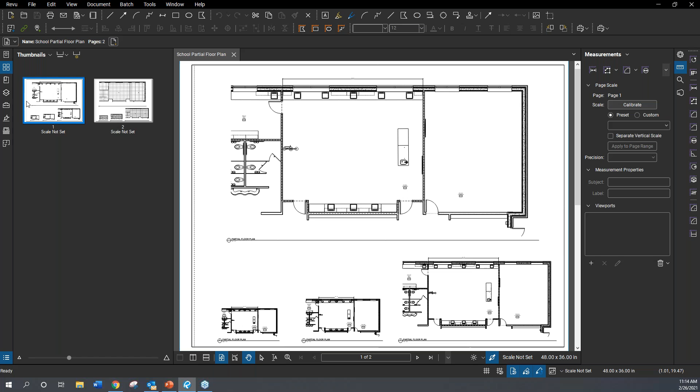So with that said, let's get right into the software. This is Bluebeam Extreme 2020 version. As you can see, I have a PDF file - this is a school building, a partial floor plan of the same area. What I want to bring to your attention is when I go over here to thumbnail, you'll notice down here in the corner next to the page size, it says scale not set. You can also come up here and engage this that says page scale, so it will show the scale of that particular page right here in the thumbnail.

Before we get started with anything, what I like to do is set the scale. So you can click right here, and here are the two different options that we have - we can either put one in by using a known dimension. Let's try that way. I'm going to zoom in here, and here's a known dimension that we have - I'll put in 34 feet 8 inches, and now let's go ahead and measure that.

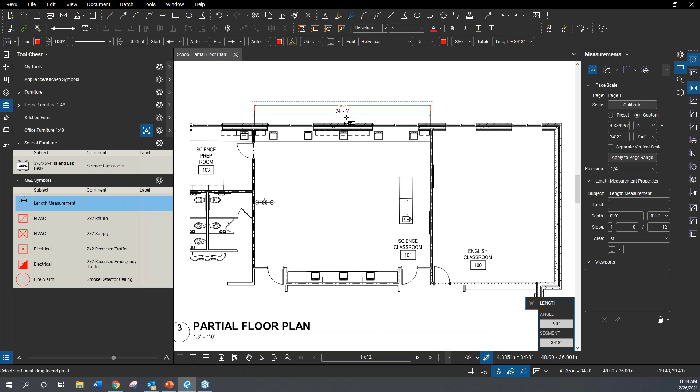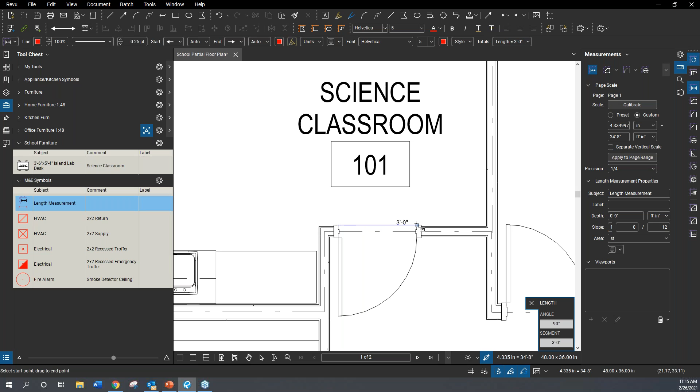Now that the scale has been set for this particular PDF, we can go ahead and do some other things. After placing the scale, let's do one other measurement. Let's measure this door, and we see that it is 3 feet wide, which is great. Just wanted to do at least 2 dimensions.

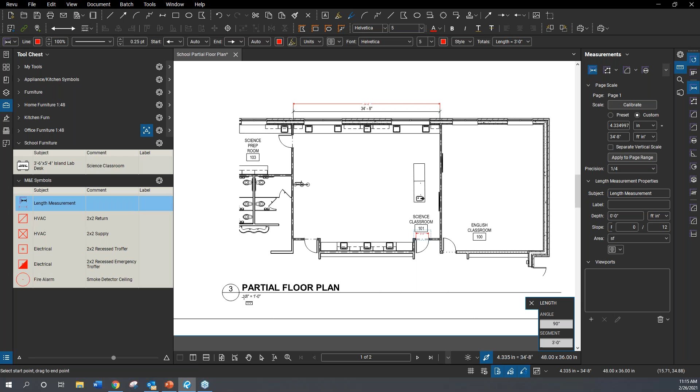If you notice in this particular drawing, I have 3 other outlines of this same floor plan. So I could possibly put some of my content over here, and you can see the scale is set to an 8th. Well, how would I do that with these other areas? How would I be able to mark up this PDF and have everything work properly from a scale standpoint?

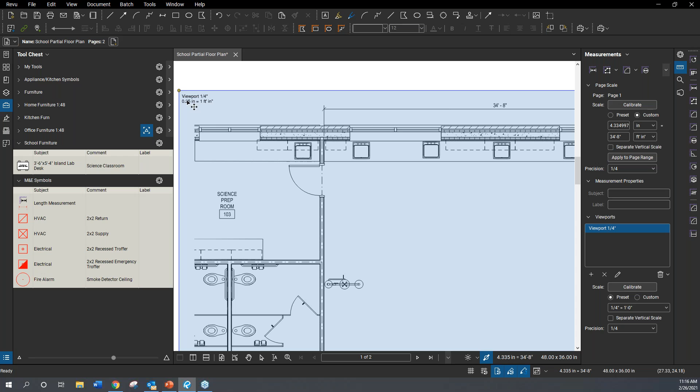The way you do that is you come over here where it says viewports and hit the plus arrow. I'm going to set the particular area, picking this whole area right here, and give this a name. This one is the 1/4 inch. Of course, you can set the scale right here, it's already set to 1/4 inch. Hit apply, and as you see, it says 1/4. My scale is called 1/4.

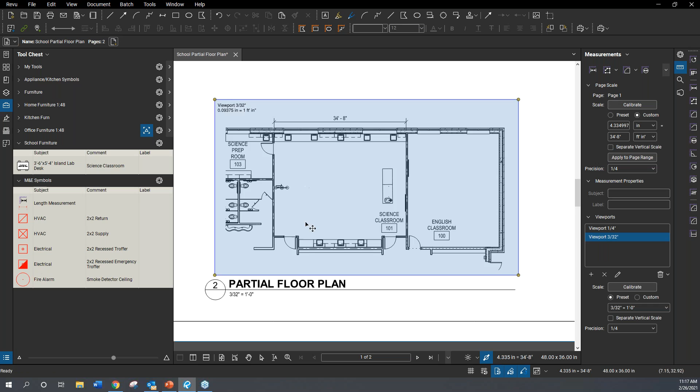I'm going to come over here to this one and create another one. I'll do the pull down and set this one to 3/32. Let's do one more, leave this one up here, and let's do a 1/2. As we can see here, a 1/2.

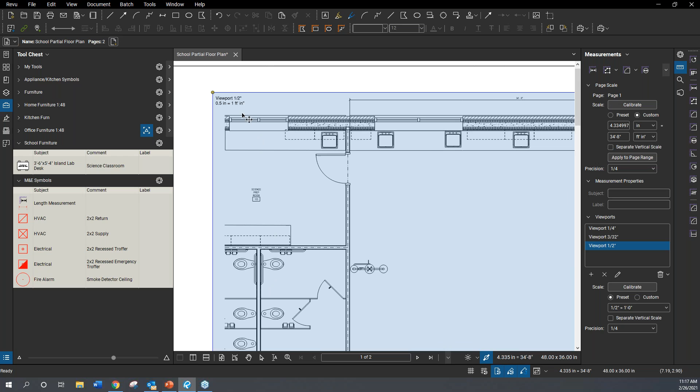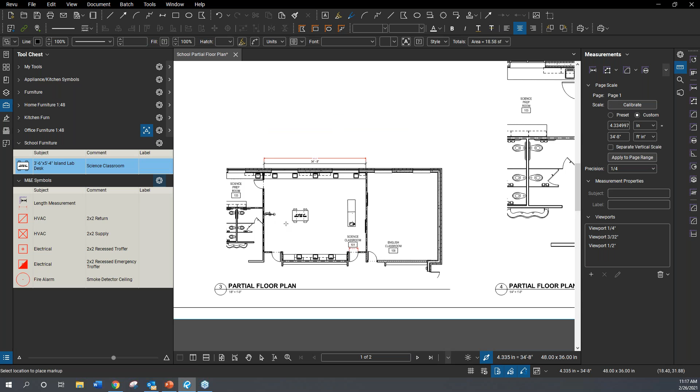So now with our scale set for the PDF document, we can start to use some of our symbology over here. Before I place it, let's say I select this particular table. If I place this table on the 3/32 inch one, it looks pretty decent. But if I go over here to the 1/4 inch, notice how it did not change size. So how could I use this symbology to match up with the scale of everything else?

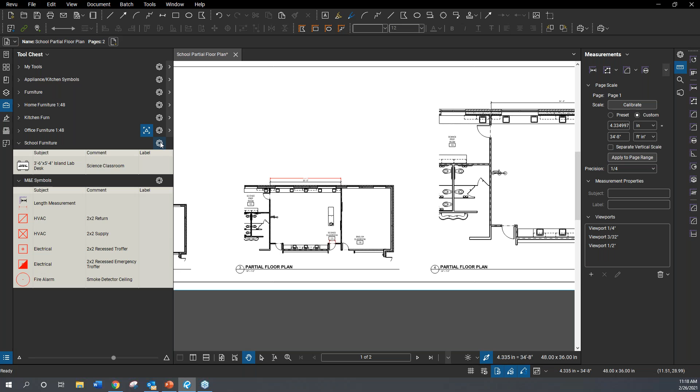What you can do here is click on the gear. You can also set a scale for your items in your tool chest. So I'm going to set a scale input preset to an 8, and hit apply.

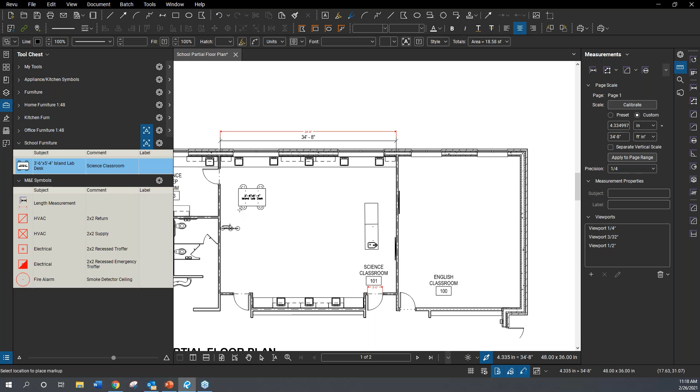So now if I place these tables in my classroom, or my science classroom, what if I take all of these, right click, and group them. I'm just going to add this particular group of tables to my school furniture tool set. You see those populate right over here. So what if I wanted to use this same layout over here?

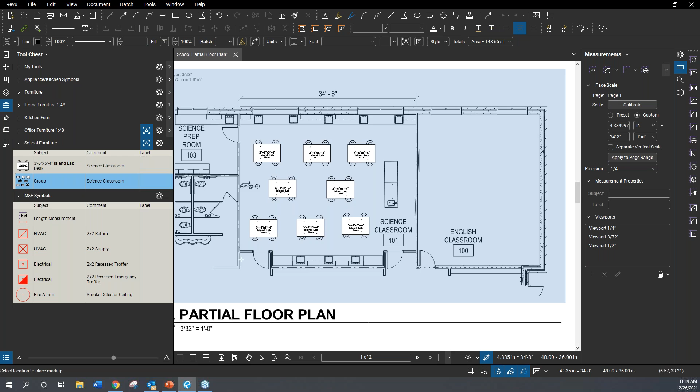Notice how the size of it changed to match up to the scale of that PDF area. Same thing when I go over here to the 3/32 inch, everything's matching up real nicely. Even when I go to the 1/2 inch one. I think that's pretty snazzy.

Any questions so far? Has anyone had any questions come up, Rebecca?

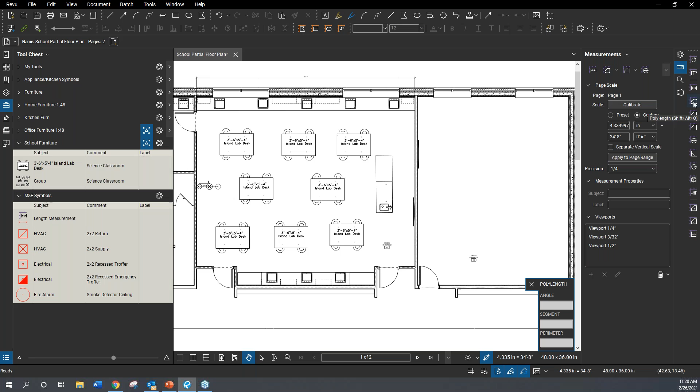Another thing we can do here with respect to doing poly length, I can select poly length over here. And as you can see, it gives me a total distance of 52 feet and 10 inches from this door all the way over to this door.

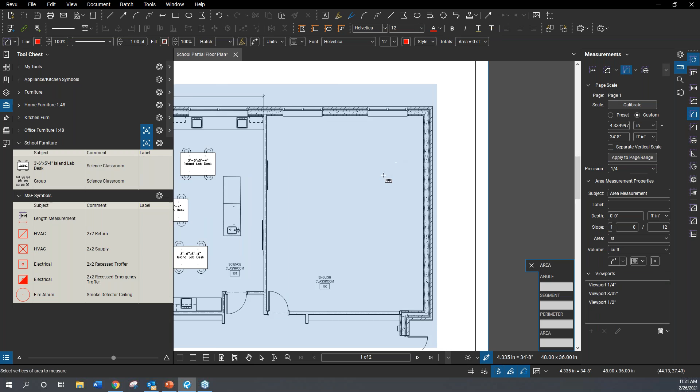Another thing I'd like to show you from an area standpoint, we come over here and do an area, and I can go ahead and do the same area. If you also notice, it's snapping to the edge of everything. So we can do areas.

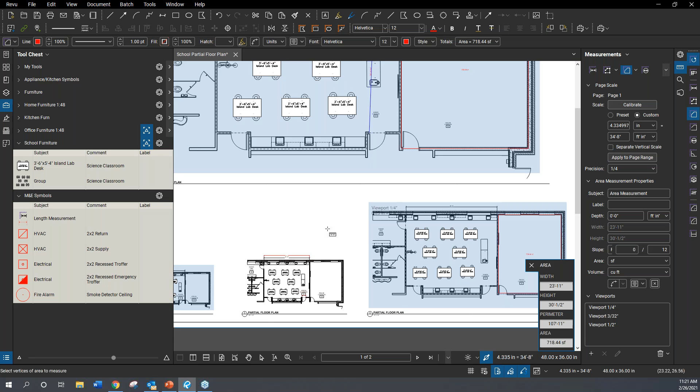What I also want to show for my MEP people that are on the line, let me go to my second sheet. With my second sheet, as you see, I don't have a scale set, so this time I'll use the input scale, 1/8 of an inch, and apply the scale.

What I'd like to show you here is I'll do a viewport for this particular area, set that to 1/4, and we'll do a quick one over here for the 3/32 one.

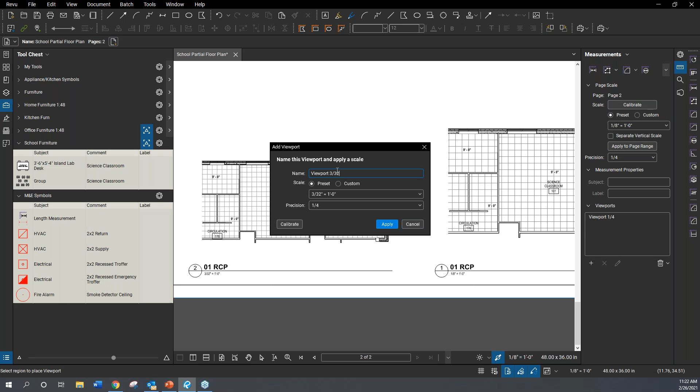Now that I have that, we can come over here to our MEP symbols. We can set a scale, and now I can place down a return air diffuser, supply air diffuser markups, if I was doing some sort of layout for someone to do this particular work.

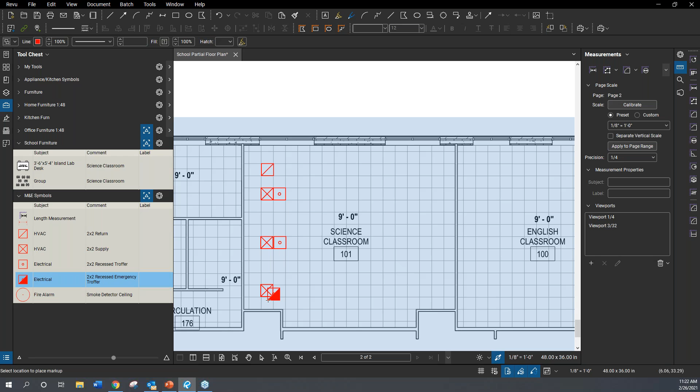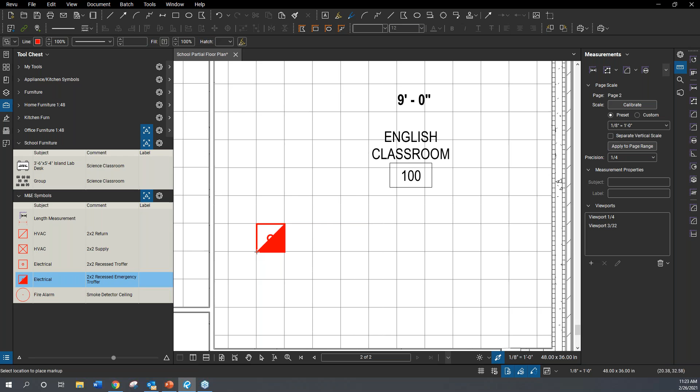Show light fixtures, emergency light fixtures. If you notice, if I pop over here to my 1/4 inch one, you can see that even as I'm placing this emergency symbol, it's matching up to the grid. It doesn't matter where I am, if I'm doing eighth, those symbology would use.

Even for fire alarm, so if I show my fire alarm symbology here, I can come over here, and as you see, it immediately goes to that particular scale on that particular viewport, as well as over here for the 3/32 one call out. All of these symbols to the left, I made, and of course set the scale.

Anytime you don't want to utilize the scale, you can turn that off, and then everything will go back to normal. As you can see, it's not scaling to that particular viewport.

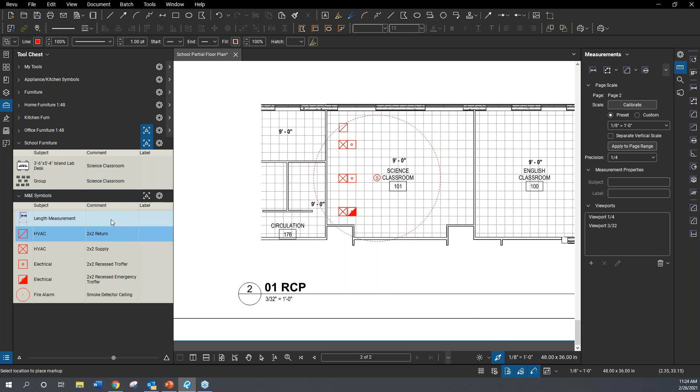Any questions, Rebecca? Okay, so no questions came up so far, Rebecca? Nope, I don't see any just yet. Okay.

Well, awesome, awesome. Even with now, the content I showed you down here is content that I made.

Let's see here, there's a question that just came through. Oh, could you show the process of creating a symbol? I sure will, thank you for asking. So let's see.

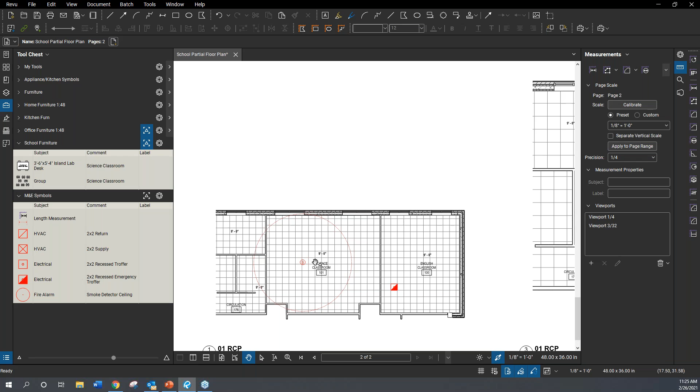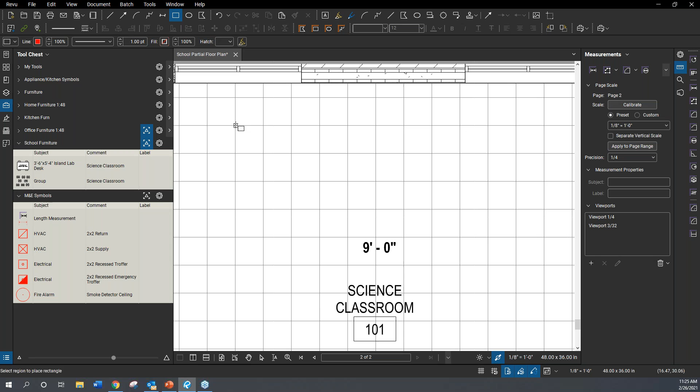Let's say I'm going to make, for example, let's do a 2x4 light fixture. What I would do is come up here and draw in a 2x4 light fixture that I would want.

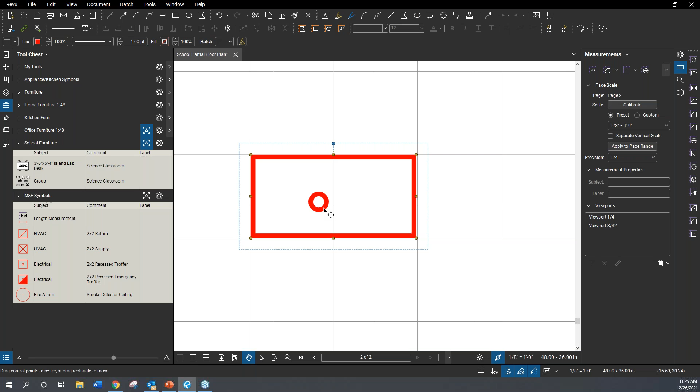And I'm gonna go ahead and show my circle, holding down the shift key for the circle. And if I'd like for this to line up, I'm gonna select this circle plus the square, do a right click, do alignment center, and do alignment middle.

What I like to do here is a right click, and I'm gonna do a group, so group that all together. And then what I would do next is assign this to be part of a subject matter. So the subject matter I want this to be part of would be electrical.

And then I can put in here 2x4 recessed troffer.

So once I have this symbol created, do a right click, add to tool chest, and then I'm gonna put this under M&E. You can see it right over here.

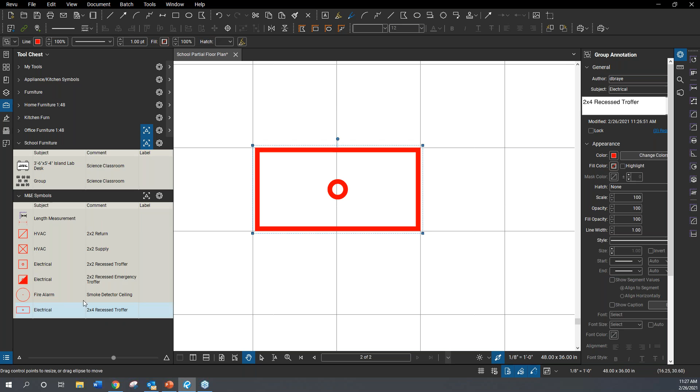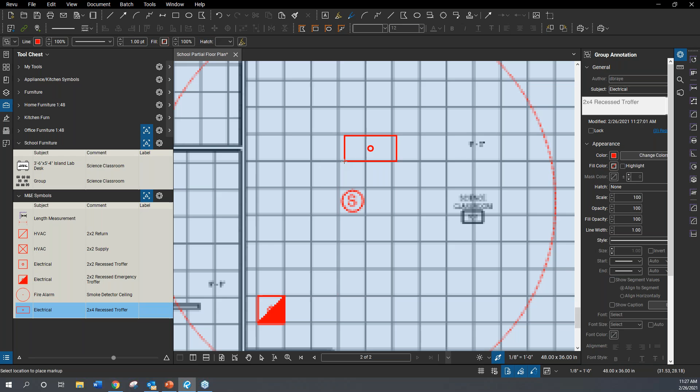So now that we have this symbol created, of course, I can engage the scale, place the scale, place the symbology here for the 1/8 inch one, and then place it over here for the 3/32 one, as well as the one over here for the 1/4 inch one. That's how you can create symbols. Great question, I hope that answers your question.

Were there any other questions? I don't see any right now, but we can give you guys a minute to get those in. And also, just before we forget, there is also a handout attached here as well, which I'm sure Douglas will go over. But if you guys want to take a look at that, just so we don't forget to mention it. But if there's any other questions, feel free to throw those in now so we can answer them for you.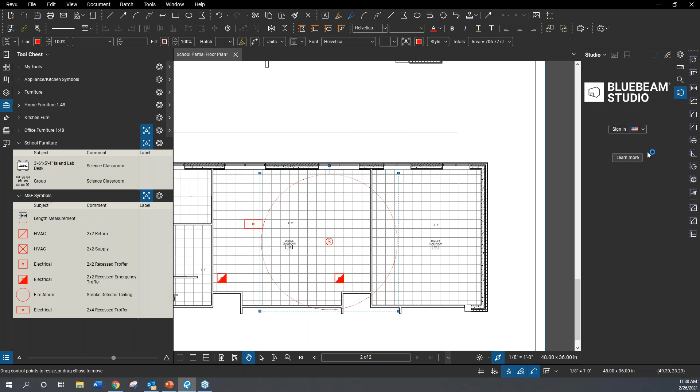Bluebeam Studio Sessions. As you can see here, I'm not signed into Studio as of yet, but we could do - here it is right here, Sessions. That's a real nice feature where you can have multiple people marking up the same PDF.